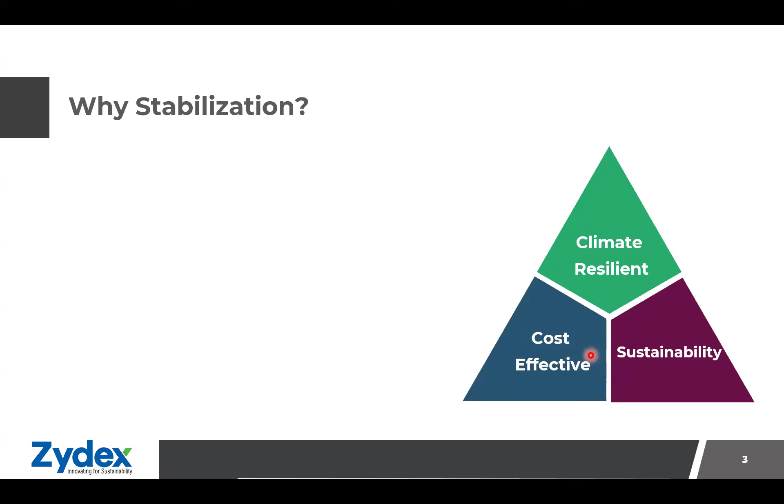We need to construct our future pavements by considering three important points: they need to be climate resilient, able to sustain changing climate conditions; cost effective; and they need to satisfy the sustainability development goals led by UN missions. So why is stabilization needed?

Basically, right now we are mining and hauling materials for road construction, which disturbs the ecology and environment. We need to construct with marginal materials and soils, recycle the existing crust material to achieve cost effectiveness and sustainability goals, and increase the service life of pavements with increasing traffic demand and changing climate, addressing climate resilient conditions.

Stabilization is a technique to improve the properties of soil and pavement layers. We have two types: mechanical stabilization, where we add granular material and compact it, related to correction of grain size distribution so we can have maximum packing density and minimize void content; and chemical stabilization.

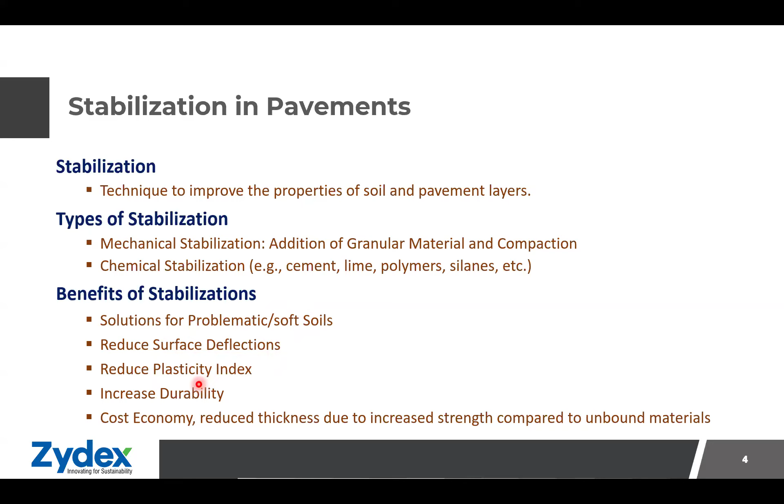In chemical stabilization, we use binders such as cement and lime, and in conjunction, chemical stabilizers such as silane-based products or polymers. The benefits of stabilization include solutions for problematic or soft soils where we cannot satisfy the CBR greater than 5 condition, failures with respect to surface deflection, problems related to pavement foundation, inadequate subgrade or base or sub-base strength conditions, and in many cases, it's required to reduce the plasticity index.

So stabilization works very well, also in conditions with prolonged monsoon seasons or stagnant water, where we need to increase the durability of the stabilized layer. In addition, we can reduce the thickness of the bituminous layer, because the stabilized layer has higher strength compared to unbound materials.

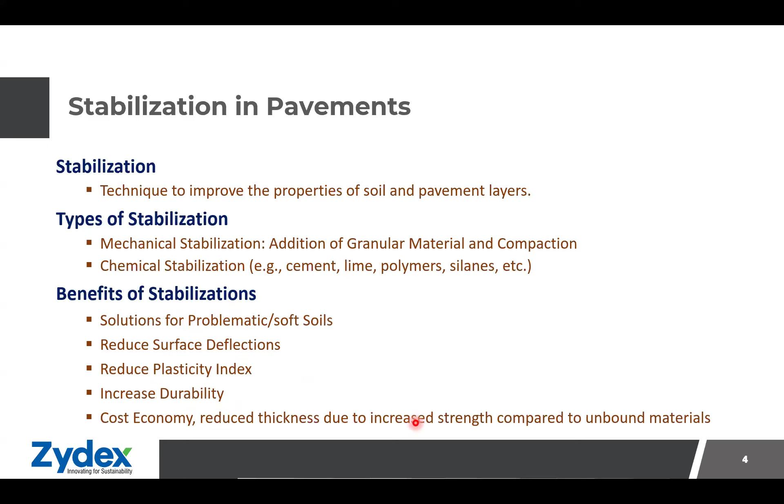Talking about the specifications for design, we have two specifications. The first one is IRC SP 89 2010. The title is Guidelines for Soil and Granular Material Stabilization using Cement, Lime, and Fly Ash. This guideline is basically for conventional stabilization agents such as cement, lime, and fly ash.

The second one is the amendment to the first one, released in 2018. It is IRC SP 89 Part 2, titled Guideline for Design of Stabilized Pavements. This was specifically developed for the use of commercial chemical stabilization with and without conventional stabilizers.

In the market, we have numerous chemical stabilizers. To name a few, we have natural inorganic powder binders, silane-based chemicals, waste oil, petroleum-based products, liquid stabilized products, synthetic polymers, and sulfonate lignin.

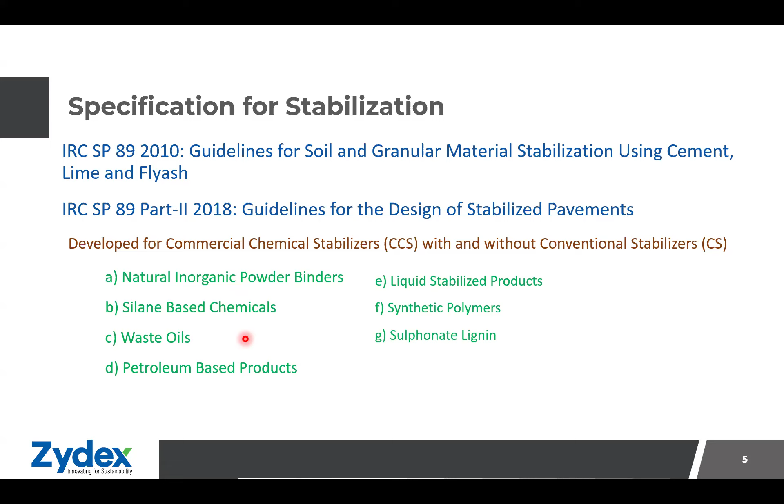Talking about the mix design for stabilization, our objectives are to provide adequate strength and durability to the pavement. We should have construction ease as well as economy. The guidelines specify two requirements for the design, and that is the testing requirement.

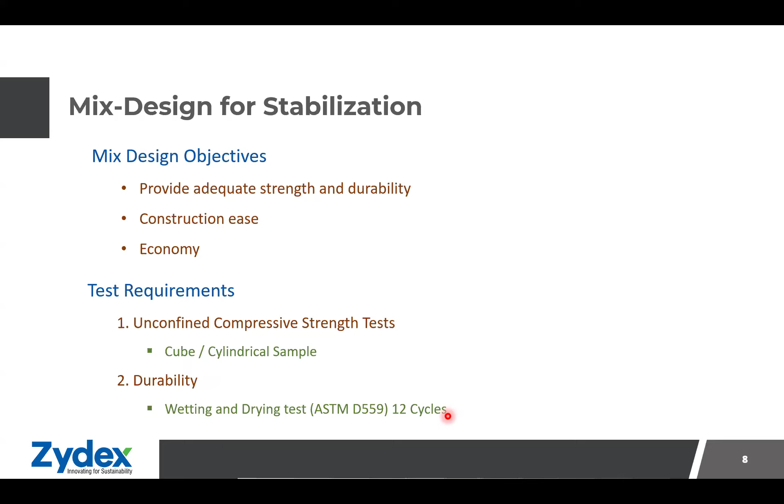The first one is the unconfined compressive strength test based upon a cubical or cylindrical sample. The second test is the durability test, to check the impact of water. In this, we have drying and wetting cycles, 12 cycles, and we measure the amount of mass loss after each cycle. We also report the UCS under dry ratio of wet to dry UCS as a residual UCS.

Now, talking about pavement design, the most important parameter for the pavement design includes the resilient modulus. We need to give three inputs to the IIT Pave for each layer: the resilient modulus, its Poisson ratio, and its trial thickness.

Based on that, we can do the stress strain analysis, and then using the distress functions, we can find out the adequate pavement layer thickness. The guidelines suggest the resilient modulus depending upon what type of hardening chemical stabilizer we are using.

For rapid hardening, the guidelines suggest using a multiplier of 1000 multiplied by UCS. That will give the resilient modulus for the base layer with a rapid hardening CS. For slow hardening CS or CCS, the guidelines suggest using a multiplier of 750.

Further, for design, we need to consider 20% of the MR value calculated using these two equations. If we are measuring the modulus using a 4-point bending test, we need to consider a safety factor of 1.5. For flexure strength, we can take directly the 20% value of UCS and use that value for the fatigue analysis.

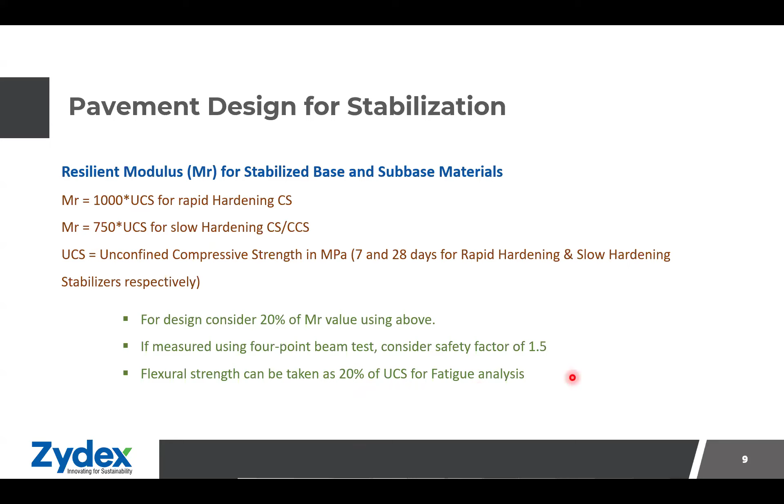Now, for the specifications for stabilization, first for the base layer, we need to achieve the UCS in the range of 4.5 MPa to 7 MPa. The laboratory strength shall be 1.1 times higher than the design strength. Also, there is an upper cap on the modulus value that we can consider.

For the modulus value based on the UCS empirical relation, we have an upper cap of 1400 MPa, whereas we have an upper cap of 1700 MPa if we do the beam testing. The guidelines also suggest doing the flexure and cumulative damage analysis as suggested by IRC 37, 2018.

For the subbase layer, the UCS needs to be in the range of 0.75 MPa to 1.5 MPa, whereas the modulus value shall be 400 MPa for the design.

Now, I'll list a few issues or cautions that one needs to consider while designing the stabilized pavement. The first issue is that the empirical equations adopted for the calculation of resilient modulus, that is the multipliers 750 and 1000, are valid for high quality crushed rock or natural non-plastic soils.

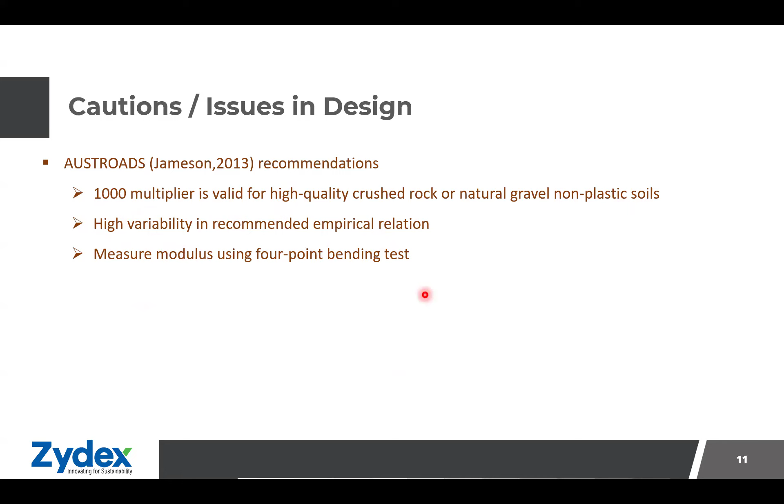Also, AUSTROADS notes there is high variability in the empirical equation, and therefore recommends measuring the modulus using a 4-point bending test. The multipliers we are currently using are not valid for soil aggregate mixtures with a PI of more than 20 for subbase and more than 10 for base layers.

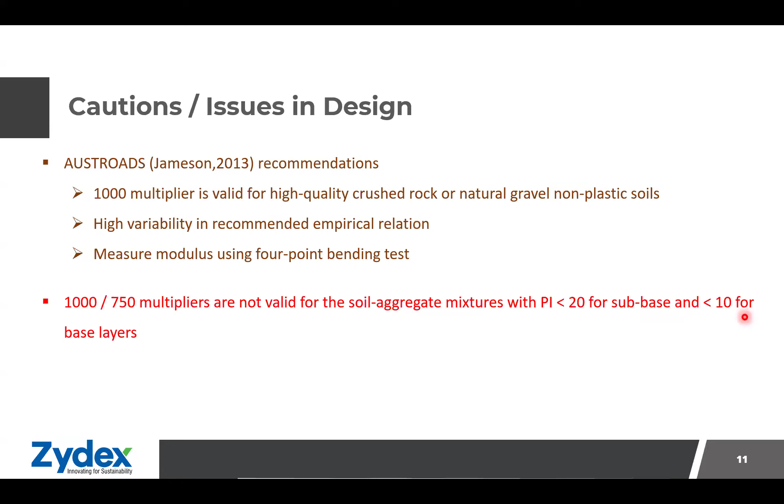Therefore, it is recommended to measure the flexure strength and flexure modulus using a 4-point bending test. There's an appendix in IRC SP 89 which talks about the measurement of modulus using a 4-point bending test.

But the guideline recommends measurement under static or monotonic loading conditions. Also, the formula for modulus needs correction as it does not consider the deflection or strain value while calculating the modulus. Therefore, it is important to measure the flexure modulus using a 4-point beam test, considering the deflection, as well as under repeated loading conditions.

This is important because the flexure fatigue models are developed considering the modulus under repeated loading. The modulus that we get from monotonic loading as well as under repeated loading may not be the same.

This is one of the equations as suggested by AUSTROADS AGPT T600. This equation is for modulus calculation, and it considers the repeated loading as well as the resilient deformation that we get through the repeated loading.

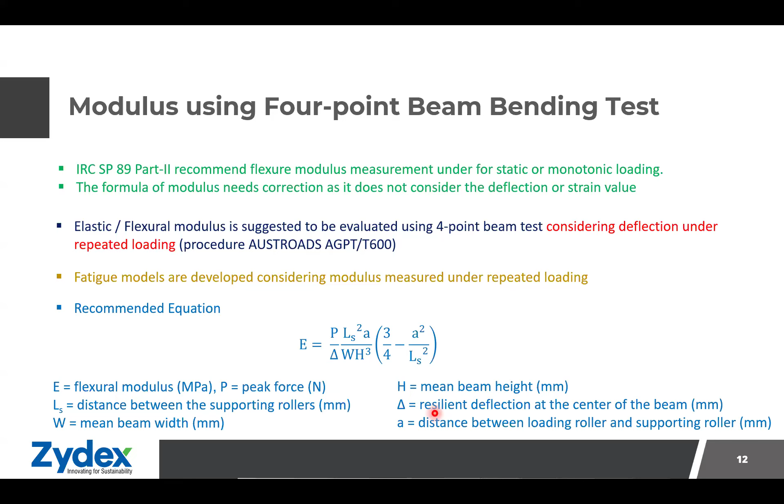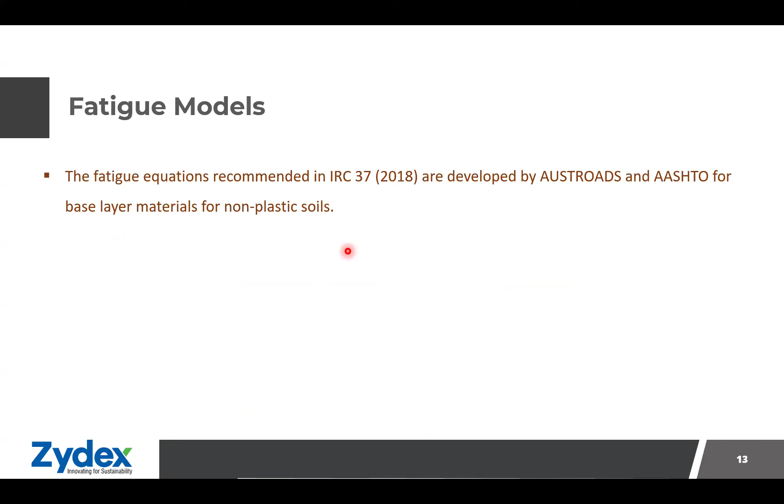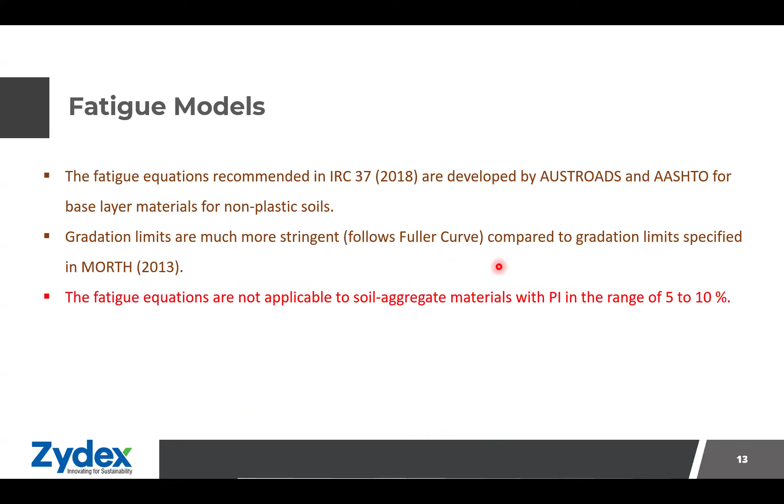Further, talking about fatigue models, the fatigue equations recommended in IRC 2018 are developed by AUSTROADS for base layer materials for non-plastic soil, as indicated previously. Their gradation limits are more stringent, following the Fuller curve, with allowable limits within a very narrow range. But the specifications laid in MORTH are quite wide. Also, the fatigue equations are not applicable for soil aggregate materials with PI in the range of 5 to 10. Therefore, we need to develop our own fatigue equation for both conventional and chemical stabilizers specific to the material specifications used in India.

Further, we also need to consider the impact of moisture on modulus. For the subgrade, we consider the 4-day soaked CBR. This is considered in order to simulate the worst case scenario that can happen in the field.

But for the stabilized layer, are we really considering the correction for the modulus, or are we measuring the modulus under wet condition? That is questionable. The current framework we are following is measuring the UCS at 7 or 28 days, depending upon the hardening agent used, and then using empirical equations or the 4-point bending test to find its elastic modulus, and then putting it into fatigue models to get the life of a pavement. But in this, we are not actually capturing the effect of wet condition in the analysis.

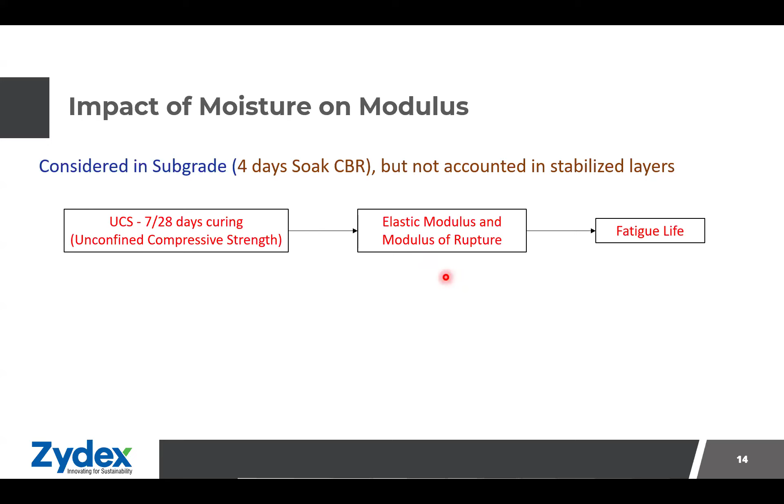There's a 20% correction factor that is considered, but does it really account for moisture or does it account for other variabilities? That is questionable. Also, we have a durability test that accounts for moisture impact, but durability measures the mass loss - it is really abrasion resistance and does not measure the material stiffness in wet condition. Our pavements undergo 90 to 100 days of monsoon. Therefore, modulus in wet conditions should be considered in the design.

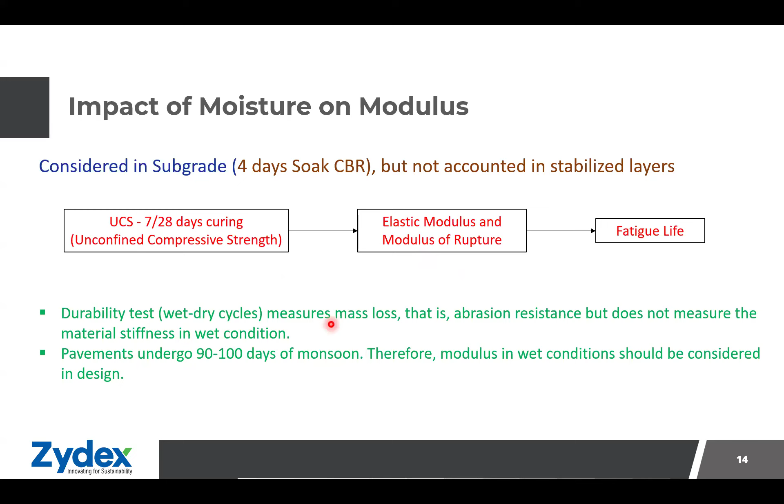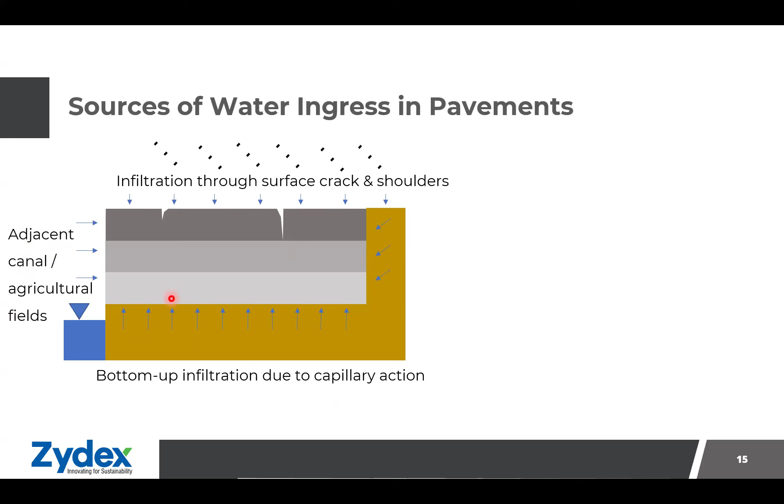Now, talking about the impact of water, we have multiple sources of infiltration in pavement. That includes surface infiltration through cracks and shoulders. We have bottom infiltration through capillary action also, and there could be side infiltration due to agriculture fields or adjacent canals. So this water leads to degradation of modulus of the structural layer that eventually leads to weakening of the pavement layers, its bearing capacity, and eventually leads to the formation of potholes, leading to failure of the pavement.

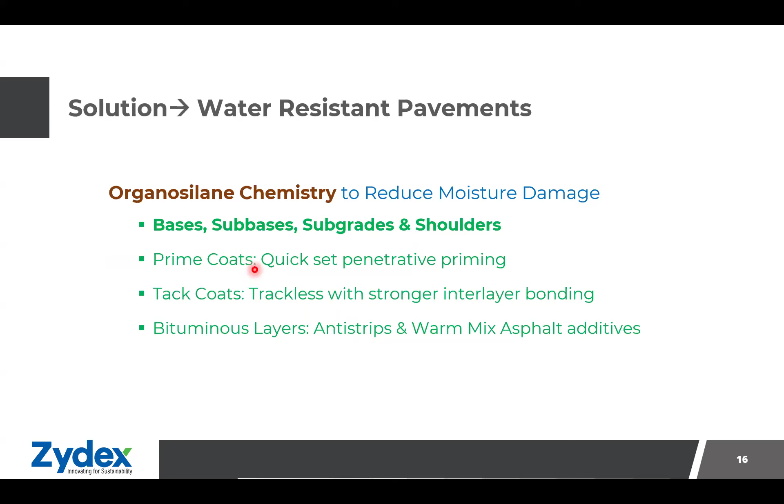Now, the solution to this problem is water-resistant pavement, where we can adopt organosilane chemistry to reduce the moisture damage. So we have the solution for all layers of pavement, but I'll be focusing in this talk on the bases, sub-bases, shoulders, and subgrade stabilization.

So what are organosilanes? Soil inherently has a water-loving nature where it just absorbs water as soon as it comes in contact, but after treatment, it can repel water as shown in this figure. Actually, soil has a surface nature of OH groups, which make them hydrophilic, water-loving. It consists of silanol groups as shown in this figure. Due to this, there happens to be continuous absorption of water that leads to a reduction in its modulus.

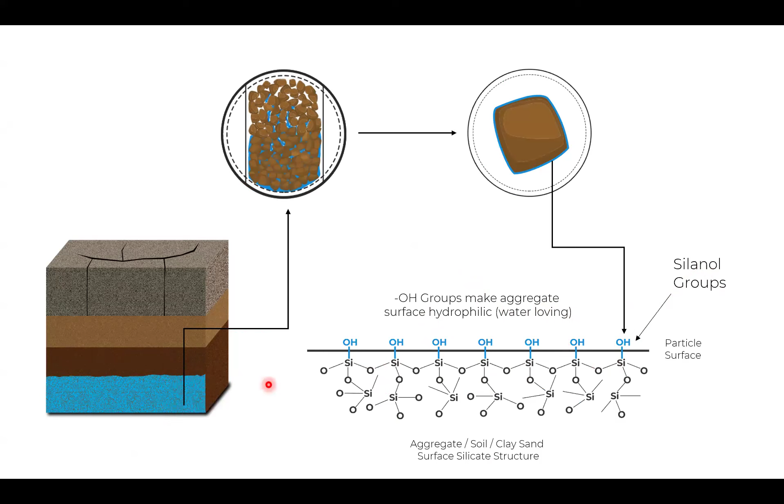Now, once we treat it with organosilane additives, what it does is create a hydrophobic zone, a water repellent zone. The thickness of such a layer is almost 4 to 6 nanometers, and this is an alkyl siloxane surface that gets formed above the soil surfaces. So essentially, this reflects in water repellency, and whatever capillary action or water infiltration that was happening gets reduced. This reduces the water ingress into the pavement layer, which reflects in retaining its modulus value even under wet conditions.

Now, what is the value addition that these chemicals are adding? We have two chemicals that go in conjunction. The first one is Terrasil and the next one is Zycobond. Terrasil essentially gives the water resistivity, while Zycobond gives modulus enhancement and nanobonding.

So the combination of water resistivity and modulus enhancement gives higher retained UCS. The combination of moisture resistivity and nanobonding gives higher dry-wet durability cycles, whereas the combination of modulus enhancement and nanobonding gives higher UCS, either at 7 or 28 days. The combination of all these gives longevity to the pavement, which gets reflected into higher fatigue life.

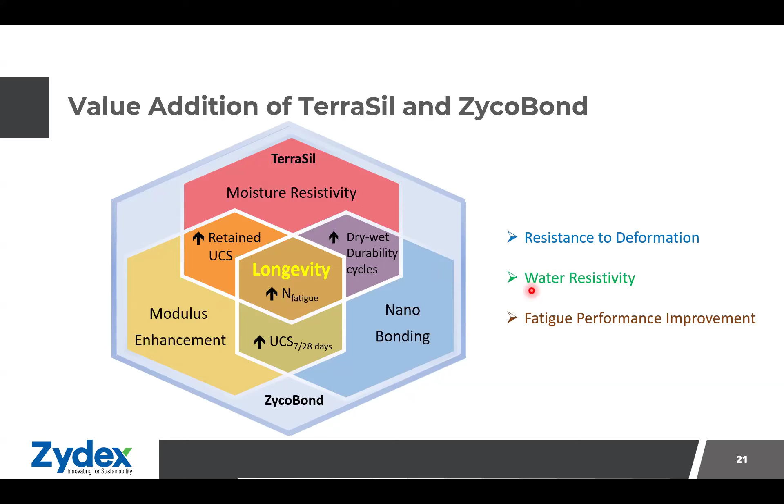So what we are trying to give is resistance to deformation, water resistivity, and fatigue performance improvement. In order to understand the impact of moisture, what we normally have is a subgrade soak condition that we consider in our pavements. But to simulate this condition in the lab...

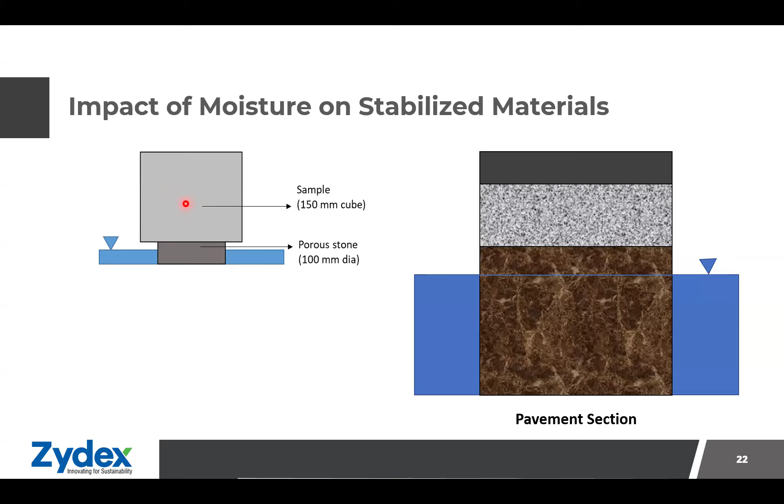I'm trying to show, if we have a stabilized base layer and a bituminous layer and a subgrade under submerged conditions, this condition can be simulated in our lab by keeping a cube sample on a porous stone, which is submerged under water. Since this is a soil plus aggregate mixture, it has a tendency to absorb water. This absorption leads to further issues and water-related damages.

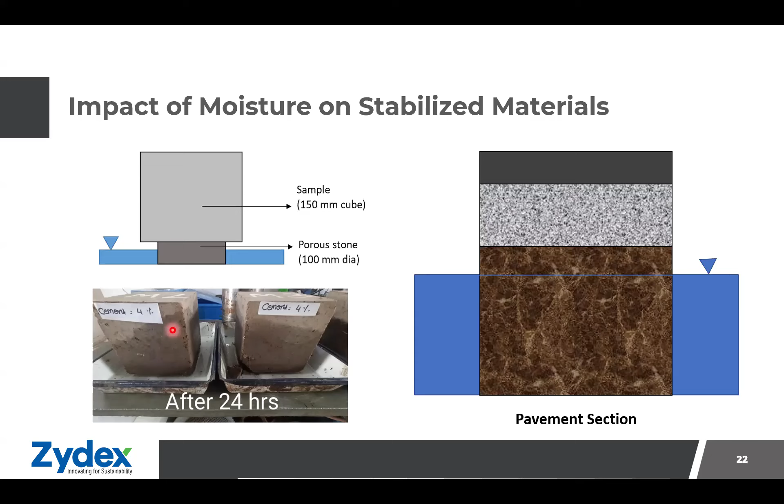So this is one pictorial view from our experiments. The porous stone, with the cube kept on it, is under a water bath. Here you can see due to capillary action, the water has been taken up by the sample. Depending upon the additive or the cement content, the capillary uptake varies.

This slide shows a sample with only 5% cement. We can see that after 24 hours, the capillary uptake is significant, with water rising up to almost 75%, or three-fourths of its height.

As we add water repellency additives, that is Terrasil and Zycobond, the water uptake gets reduced as the dosage increases. For this figure, we have a dosage of 0.75 kg per meter cube each of Terrasil and Zycobond. For the last figure, we have a dosage of 1.5 kg per meter cube.

So this is just a visual representation, but what happens to its strength? This is reported in terms of unconfined compressive strength. So let's say we have done the regular UCS casting, and after 7 days of curing with only cement, we get a UCS value of around 3.9 MPa.

But after 24 hours of capillary intake, when we measure its UCS value, it drops down to around 1.4 MPa, which is significantly less - almost less than 50% of its original value.

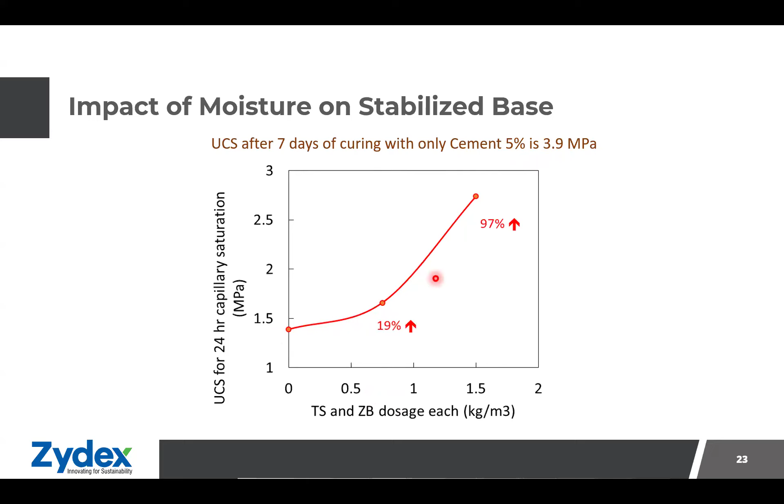But we can retain this value by adding organosilane additives such as Terrasil and Zycobond. Here in this figure, we can see at a dosage of 0.75, we can almost increase the value by 19%. With a higher dosage, we can retain the value by 97%.

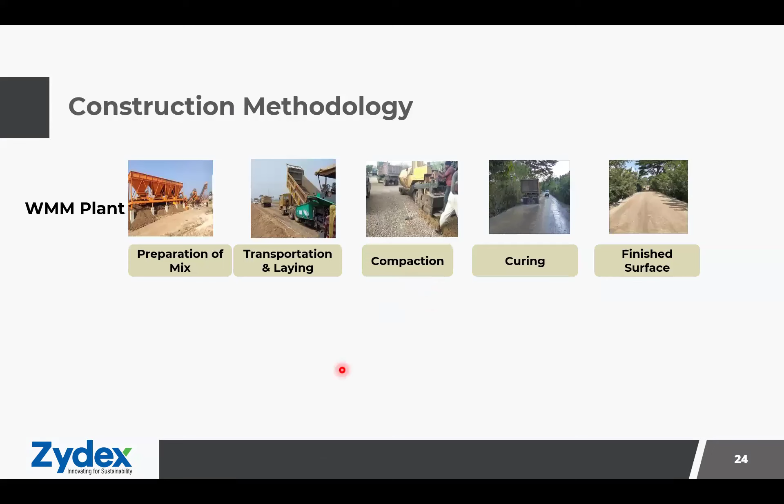Moving on to the next section, on construction methodology for the stabilized pavement - I won't go into details, but just briefly touch on it. We have two types of construction methodology: one is WMM plant-based, and the other is recycler-based.

The steps are shown in this figure, which include preparation of mix, then transportation and laying, further compaction, curing, and then the finished surface for the stabilized layer.

This can similarly be done in a more proper way using a recycler. This includes cement or additive spreading at the first layer, then water and chemical additives addition, and then in-situ recycling of the pavement layers.

Further, it consists of rolling and grading as per the camber requirements, and then final compaction using PTR and vibratory rollers.

So I'll be talking about the performance post construction of this pavement. These are a few pictorial views.

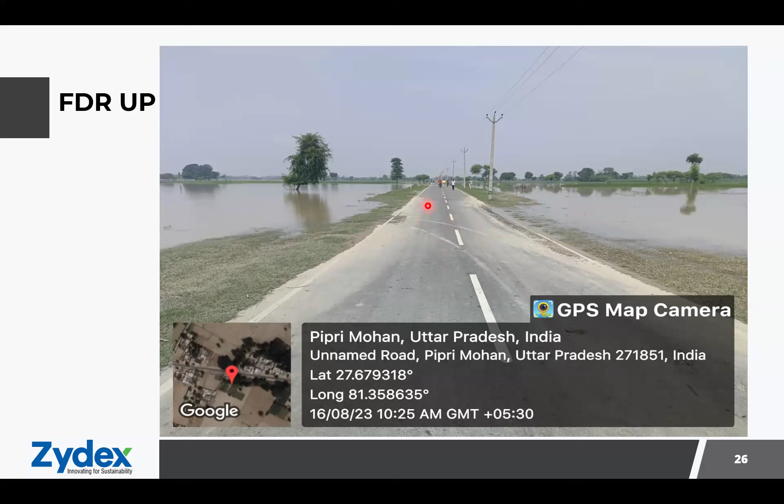Here we can see this is from the full depth reclamation in UP, where the water is adjacent to the road on both sides, and it is under completely submerged condition. But still the pavement is performing very well, giving water repellency and maintaining its modulus value. Further, the technology works in heavily frost-affected regions too.

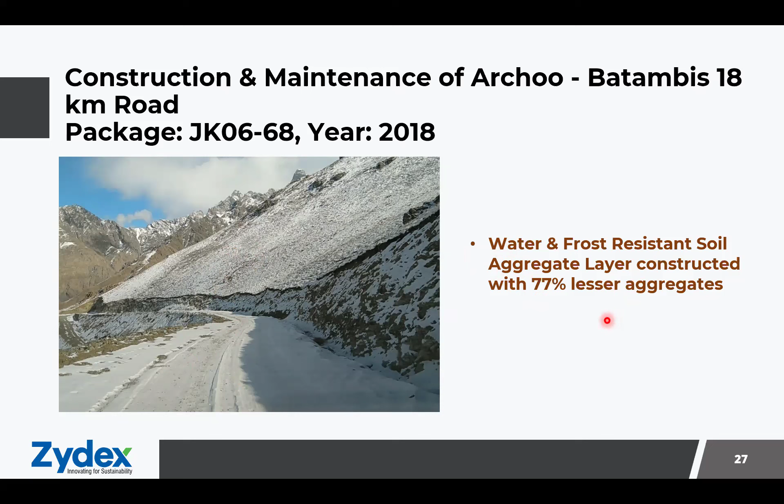You can see the snowy regions completely surrounding the pavement layer, but it's still performing under good conditions. In both conditions, we have replaced the aggregate by almost 77% and used marginal soils or borrow materials which are available locally.

Further, now I'll be showing a few of the results from the FWD test that we have done on the full depth reclamation packages in UP.

We have evaluated almost 20 roads using the KUAB FWD machine, which applies a standard dynamic load of 40 kilonewton on a bearing plate. We have geophones at standard offsets of 200, 300, 450, 600, 900, and 1200 mm, and we measure the deflections at these locations to find the deflection bowl.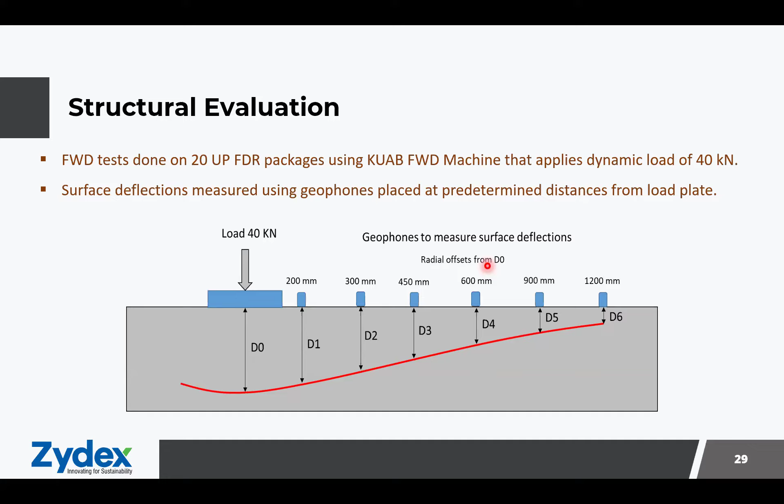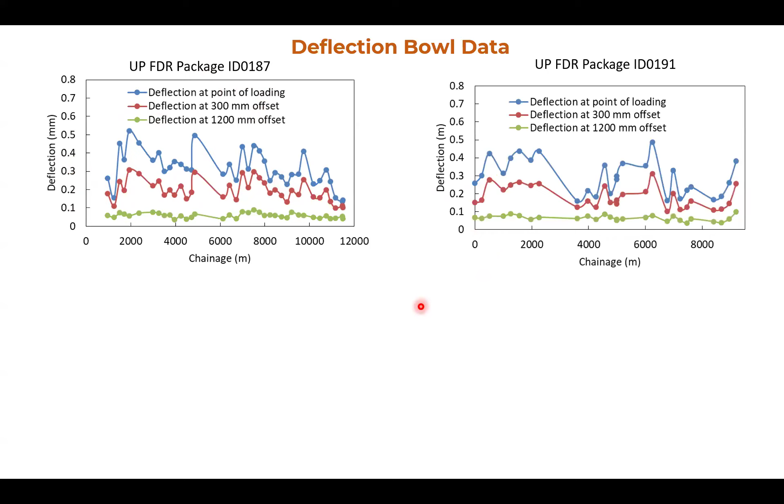This is corresponding to UP FDR package ID 187, but for just a few chainages I'm trying to show the raw data from the FWD testing. Overall, the deflection at the point of loading varies between 0.1 mm to around 0.6 mm. Sometimes, wherever there has been poor conditions or localized failure, the deflections can even go up to 1 mm, but overall the deflection is around 0.5 mm.

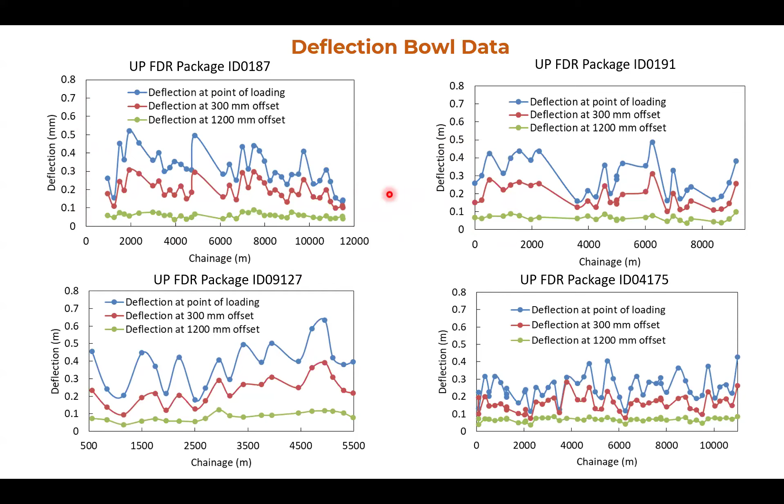This data is pre-monsoon, that is, before the monsoon season. We are also taking readings after the monsoon season. Right now the evaluation is in progress, just to understand what is the correlation under wet conditions.

Now, talking about the FWD back calculation procedure. IRC has a code, IRC 115, which is practiced for the FWD back calculation procedure, but it is specifically developed for conventional unbound materials. It is based on a 3-layer system: surface layer, base layer or combined base and sub-base layer, and the subgrade layer. This code recommends the KGPBack software for back-calculating moduli.

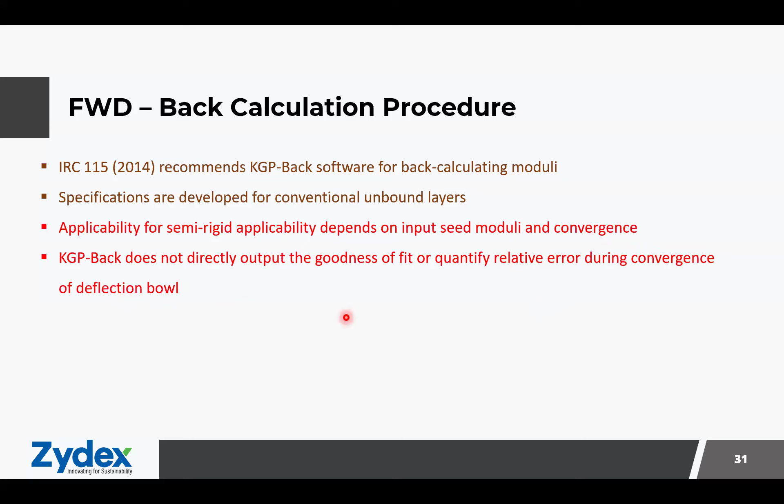Now, applicability to semi-rigid pavement depends on the input seed moduli and the convergence taking place. But the issue is KGPBack does not directly output the goodness of fit or quantify the relative error during convergence of a deflection bowl. This issue can be addressed by iteratively changing the seed moduli to ensure proper convergence, or else by comparing KGPBack's deflection bowl with IIT PAVE.

That means the modulus calculated from KGPBack can be put into IIT PAVE, and then we find the surface deflection corresponding to the offsets we considered. By comparing the two deflection bowls, we can measure the relative error in terms of R-square, or we can also consider the root mean square error.

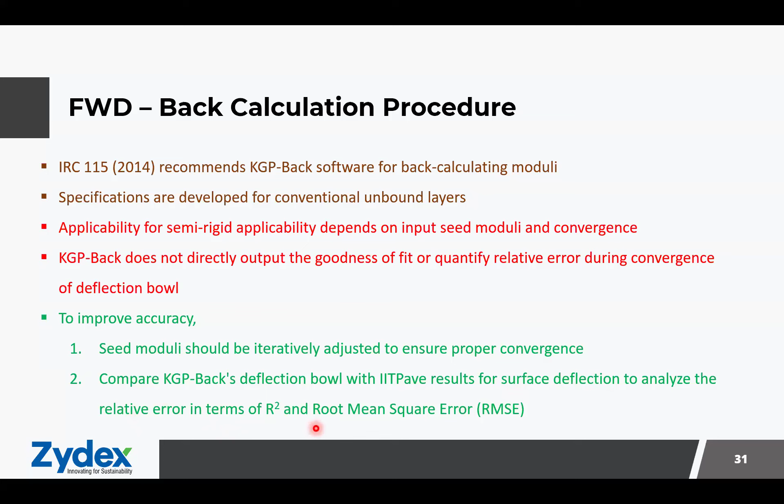Now let me illustrate the problem associated with the FWD back calculation. Let's say we have measured the FWD bowl using the KUAB machine, shown in the red line in this figure. On the y-axis I have the deflections, whereas on the x-axis I have the geophone offsets.

Now, if I consider the seed modulus based on the models we're considering — the multiplier of 1000 and 750, the relation between resilient modulus and UCS — the expected range of the base material will be 4500 to 7000, or around 3375 to some value if I consider the 750 multiplier. For the BC layer, it will be 750 to 3000, as recommended by IRC 115, and depending upon the visual survey we can select this range. For the subgrade, it recommends considering a range of 220 to 100.

Now, if we consider this input into KGPBack, it will give us results, but it will not indicate whether the bowl has converged or not. So the back-calculated modulus it gives will look something like: 759 for the BC layer, 4502 for the base, and 99 for the subgrade.

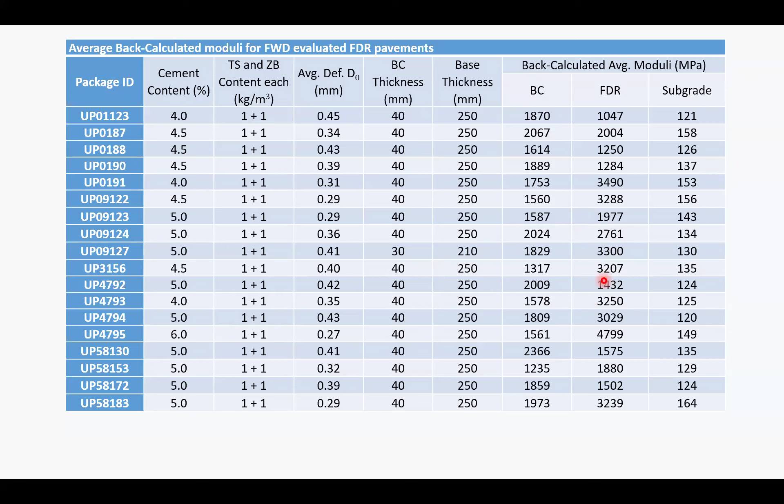This table shows results from the 20 FDR packages that we have evaluated. Overall, the modulus of the FDR base layer varies from around 1000 MPa to 3000 MPa. Therefore, the relation that we are considering is actually not applicable. We need to consider proper safety factors and come up with a proper evaluation of this pavement, and then proper specifications where we do not over design or under design our pavements.

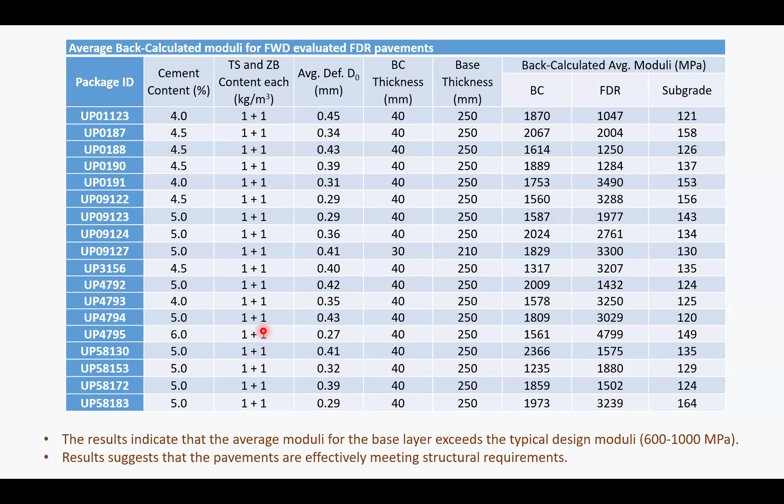Overall, the results indicate that the moduli exceeds the typical design modular value we are considering. That is because we have considered a safety factor of 20% based on the empirical equation. So this result suggests that the pavements are effectively meeting the structural requirements they were designed for.

Now I would like to highlight that we have evaluated base stabilization under heavy vehicle simulation testing that we did in South Africa. In this test, we applied an 80 kilonewton wheel load, double the standard wheel load of 40 kilonewton, but the pavement sustained almost 7 million cycles.

The results indicated that the base stabilization showed higher water resistivity and minimal deformation in wet conditions. In South Africa, there was almost 43% cost reduction, because the testing was done on marginal material, and that's how we could achieve the economy. These are the few results from the heavy vehicle simulations, as well as the actual rutting that is happening.

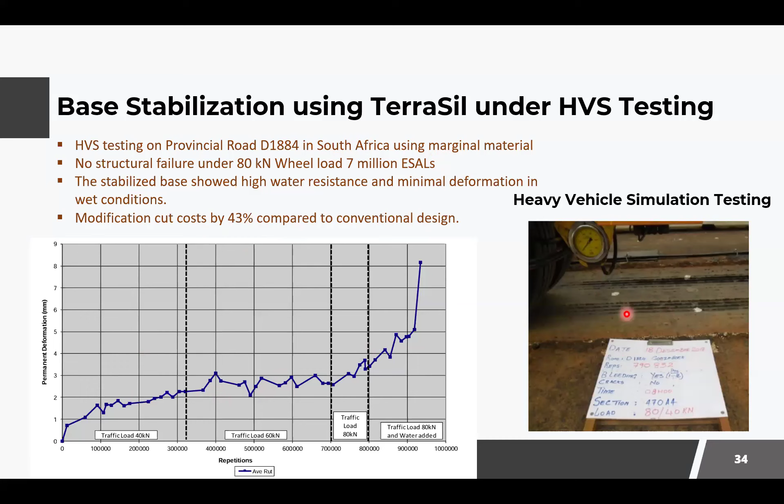Further, to demonstrate the economy, we have also constructed National Highway 208 in Tripura, where we replaced the conventional pavement section with a Zydex design, using a stabilized base of almost 340 mm. Here we have reduced the use of aggregates by 60 to 65%. This has overall led to a saving of capex by almost 10 to 20%, depending on the cost of aggregates in the localized area.

Further, we are also working on the stabilization, developing the methods. As I demonstrated, we are developing the fatigue curve for the Zydex additives under both dry and wet conditions, because wet condition is the most critical, and for that we need to design our pavement for a 90 to 100 days monsoon season.

This project we are doing with NIT Warangal. Secondly, we are also working with IIT Dhanbad, where we are doing a lab scale model and also measuring the pavement response in terms of critical stresses and understanding the value addition given by TerraSil and Zycobond. Also, we are doing a lot of FWD analysis for stabilized pavement, understanding the degradation models and developing seasonal correction factors, because the current guidelines do not talk about this specifically.

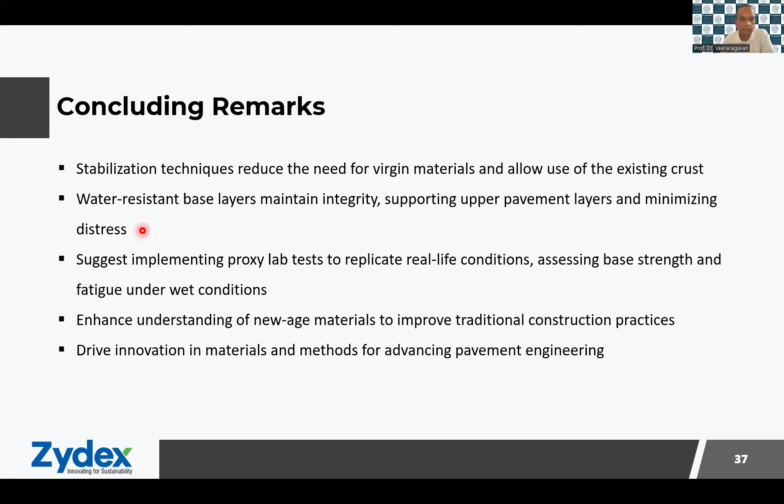Just to conclude, the stabilization technique reduces the need for virgin materials and allows use of the existing crust. A water resistant base layer maintains integrity, structurally supporting upper pavement layers, and minimizes distress. We suggest implementing proxy lab tests to replicate real life conditions, assessing base strength and fatigue under wet conditions. It is important to enhance the understanding of new age materials to improve traditional construction practice, and to drive innovation in materials and methods for advancing pavement engineering and sustainability.

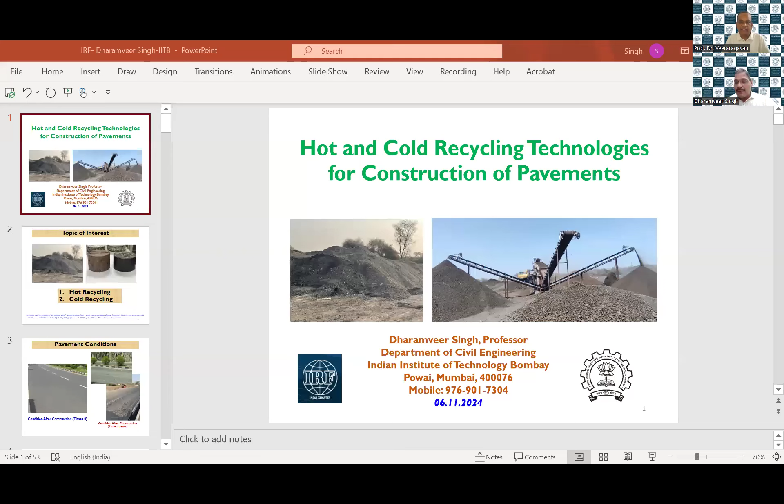Yeah, thank you, Professor Avi. Very good to see you on the other side. There are so many keywords that you have given, but 30 minutes is not enough to cover everything. I will try to touch upon some of the points. Thank you very much for the wonderful introduction, and very happy to see you. A very good evening to all the attendees here, and greetings to all. Thanks to IRF for giving this opportunity, and thanks to Akhilesh for the nice introduction in the beginning.

It's fine, you can present. I will just stop the video for the time being so that I can concentrate more on that. Professor Avi, please confirm if it is visible. Yeah, the screen sharing is seen, double click to enter full screen mode. Now is it okay? Yeah, it's fine, go ahead. Okay, I will just use this handle somewhere, it has to go maybe.

Today's presentation—I think the first presentation was quite good—I will touch upon some of the things. It's not possible to cover everything in 30 minutes, but I will give you the keywords so you understand how things are going to go. There are two things I will be presenting: hot and cold recycling. This is the interest of the topic, so we'll talk about hot recycling as well as cold recycling. Just a disclaimer: some photographs are taken from open sources, and my intention is not to commercialize anything, but to give you knowledge that you can use somewhere.

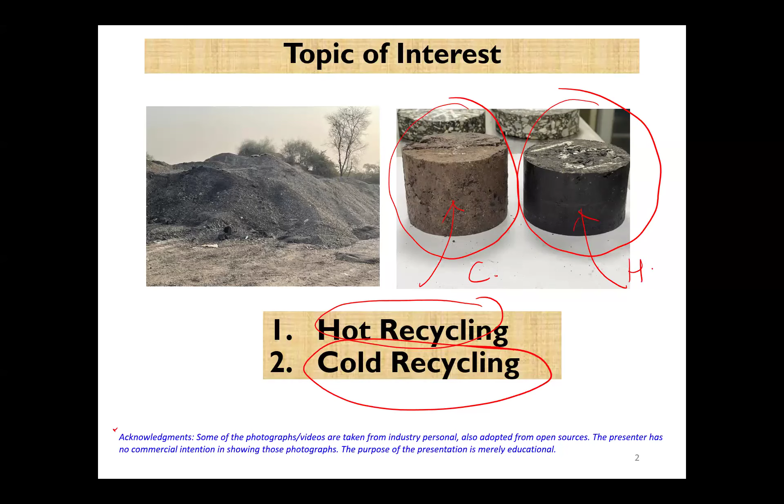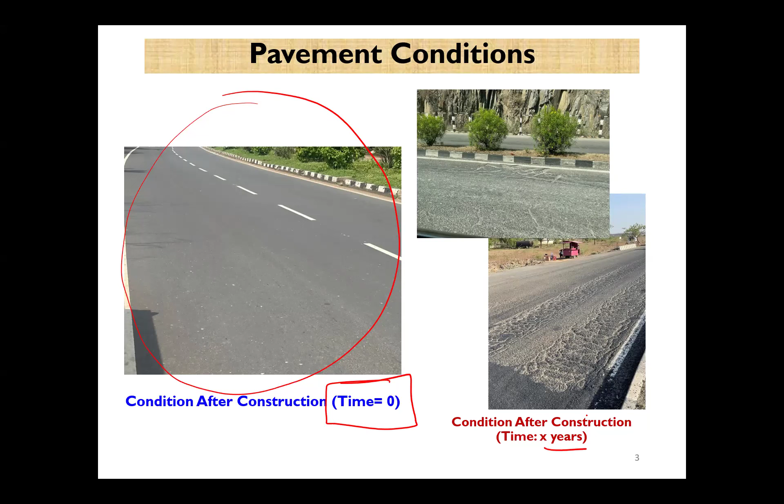However, with the time, the situation will change actually. Now, let's say for example the pavement is constructed, and this is the condition in the beginning itself, at time equals to 0. And with time, depending upon how many years, depending upon months, depending upon the quality of the work, definitely it will degrade with time actually. And certain distresses will pop up, maybe rutting, cracking, moisture damage, or certain kind of distresses. So what we can understand is that what you see in the beginning is the perfect condition of the road, and with time it will decline.

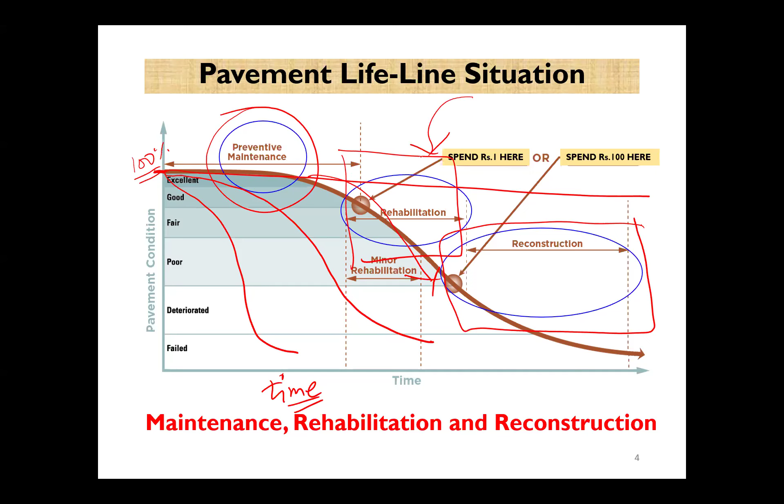Now, this is a well-known fact actually. Worldwide, if you just take the kind of material which is 100% recyclable, the bitumen mix is definitely 100% recyclable. You can use 100% recycled material in the pavement. Now there are many benefits - I'm not going to look into all these things, but this is what it comes down to most actually: if the cost saving is happening, I'll be using it. Environmental sustainability, all these buzzwords are there, but the foremost issue or eye-catcher is the cost actually - is it going to save the cost or not? If you say yes, we can use it. That is how the perception is actually.

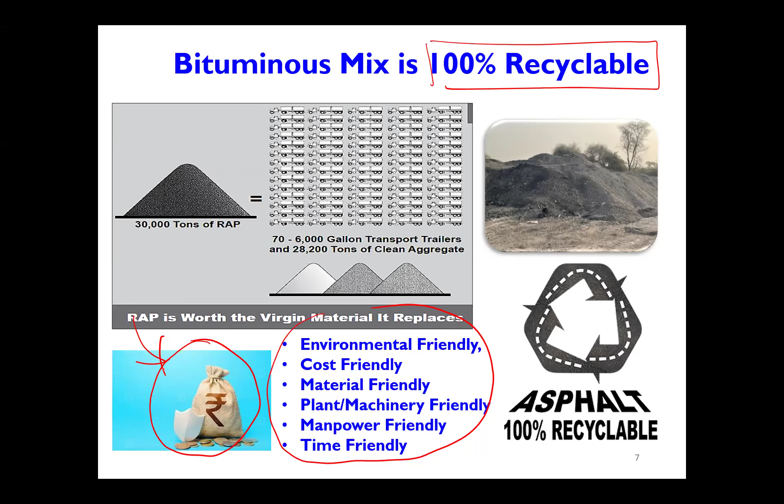And not only in India, but all over the world actually, this is how it is with all kinds of technology, whatever it is. If the cost saving is there, the next question comes whether it is going to be sustainable or whether it is going to really give good performance of the road or not actually. But yes, I think you can recycle the material 100% actually. Now, when we talk about recycling, I'm going to classify it into two terms: one is cold recycling and another is hot recycling.

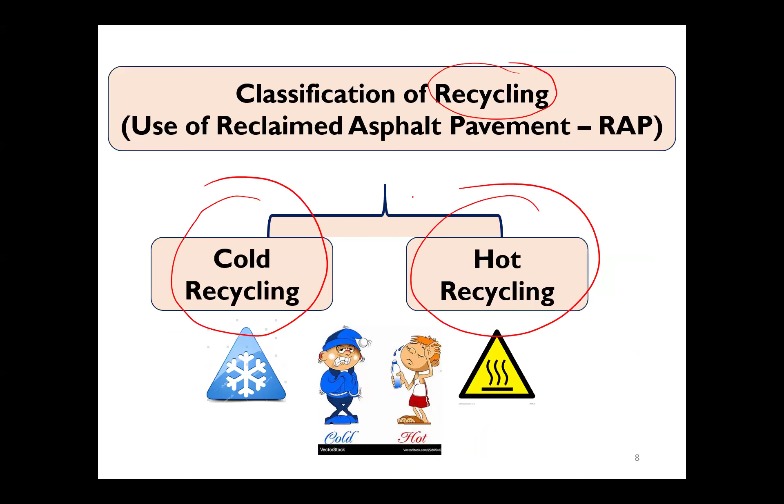The cold recycling definitely has a lower temperature. Why less? Because there are certain technologies, for example foam asphalt, where hot recycling involves going to a slightly higher temperature range.

Hot recycling, cold recycling - now we're going to talk about hot recycling first. What is hot recycling?

Hot recycling can be hot in-plant recycling or hot in-place recycling. In hot in-place recycling, you do the recycling on the spot. Or you bring the RAP material, whatever it is, onto the plant, process it there, and then start using it. How do you do that?

There have been some in-place recycling projects in India, but there are certain challenges with this technique - the machinery and the variability you get in the material. You cannot go to a larger depth of the layer because of limitations in how the machinery can really melt the material.

But hot in-plant recycling is worldwide a quite popular and the most popular technology you can think about, and you can go up to 50%. There are a couple of projects in India where people have gone even up to 60% of RAP.

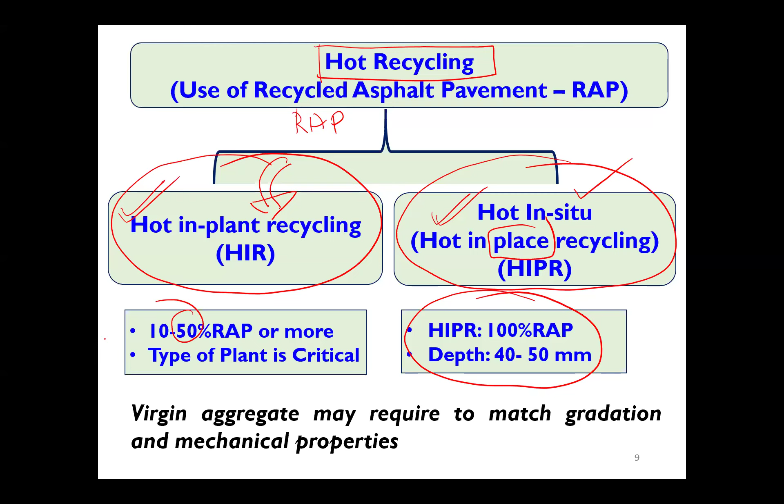And this is how we need to talk about what kind of ingredients are there, what kind of materials we can think about. These are the general queries that I see - can I even do that, first of all?

We have seen many contractors have so many questions sometimes. First of all: can I use it? Can I use the RAP? If you say yes, then another question starts. If you say no, the job stops there itself.

Can I use RAP in DBM or BC? Another question comes up, because the IRC does not allow it in the top BC layer - can I use it in the DBM layer? What percentage can I use in the DBM layer? What percentage can I use in the BC layer? All these questions are in the mind of the agency, whoever the agencies are.

Then the question comes about the rejuvenator - do I really need to use a rejuvenator? If yes, what type of rejuvenator? If no, it's okay, but you need to know about that.

Another question people fear - I've seen a lot of negligence, or you could say many people really fear the mix design of the RAP. Can I really do the mix design of RAP? My team is not trained about it. How do I do the mix design? What kind of changes do I need to make? What process do I need to follow?

Another question we see nowadays is about the plant type. I have this kind of plant - can I use up to 50%? I have this kind of plant - can I use up to 40%? Sometimes, in fact, people have gone up to 60% using a regular plant.

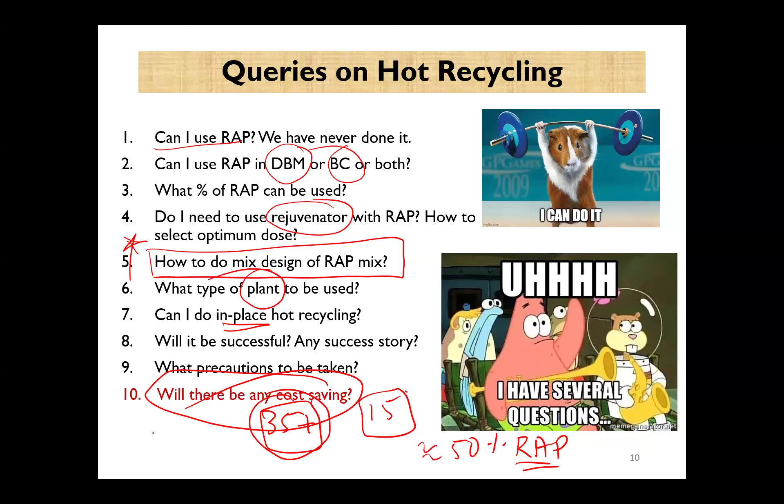These are the steps that we usually follow. Once you need to collect the RAP, remember, this collection is not just collection of the waste material. You need to be very careful about your procedure of collecting the RAP. It is not just taking out the JCB, digging out everything, pulling that somewhere and dumping it, and then you say this is the RAP.

That is not really how you get the complete benefit of the RAP. So the milling procedure has to be very careful. What kind of quality of milling that you are using, that is also very important.

Once you bring all the RAP onto the plant, and I'm going to show you a couple of photographs later on, the most important thing comes the processing of the RAP. I have not seen many contractors really following this processing of the RAP. They assume that whatever material has been collected from the site, whatever has been dumped into the plant, that is the RAP. But you have to use proper processing.

When I say processing, there are two steps. One is fractionalization. You can make it coarse RAP or fine RAP, because that will give you a better result, homogeneous mix, and good confidence level. Or sometimes there is a procedure where you can do the homogenization, mixing things together to make sure you are avoiding the variability in the RAP material. So those are very important.

Then you have to understand the RAP, what kind of RAP is there, where I need to use it, which layer I need to use it. I'm milling the DBM, and can I put it in DBM, or can I use some percentage in BC also? What kind of plant do I need to use? What kind of rejuvenator do I need to use? What is the coarse RAP and fine RAP? What kind of dosage of the rejuvenator? And then you monitor the plant production.

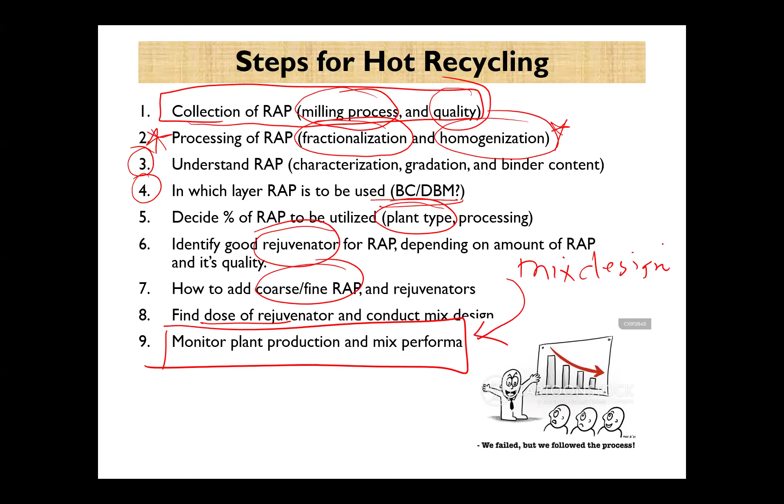Remember, the mix design itself is not your final job. If you think that somebody has given you the mix design of the RAP and you can be 100% confident on that, then you are making a mistake. Your job is to ensure that whatever the plant is producing, the RAP or the mix, satisfies the quality, not just the mix design. The mix design, somehow, it will come.

So this is how the stockpile looks like. For example, all this RAP material is here. And when the RAP material comes, it has a lot of variability. If you take one sample from here, you may find certain gradation, certain binder content. If I take one sample from here, you may find something else. If I take one sample from here, something else. How many samples do you want? Maybe 5 samples, 10 samples.

Or there are other ways you can avoid a lot of variability in the RAP if you do coarse and fine RAP. Let's say, for example, if you see here, this is your coarse RAP, and if you go this side, this is your fine RAP. Now you have much better control. Now you really have a consistent kind of mix, consistent RAP, which is coarse and fine.

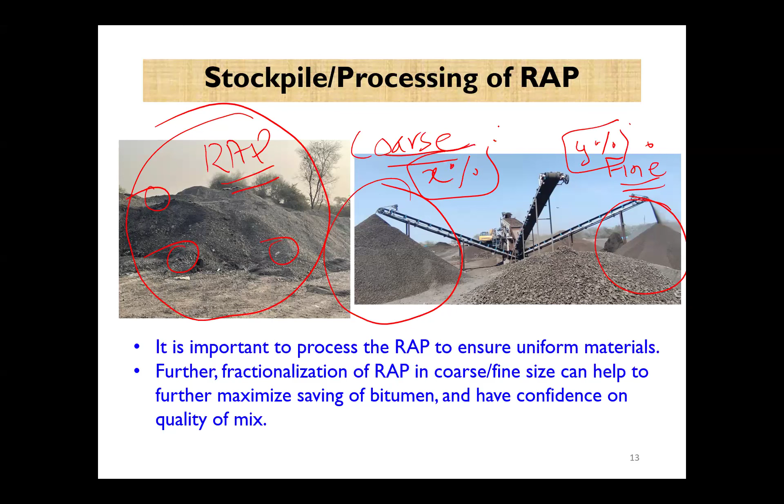And then you can use a certain percentage of the coarse, let's say X percentage, and Y percentage of the fine RAP. You have better control on the gradation, on the quality, consistency of the mix, and definitely the kind of savings that you're going to achieve. So the first step people need to really follow if they want to use a high percentage of RAP, 35, 40, 50, 60, whatever.

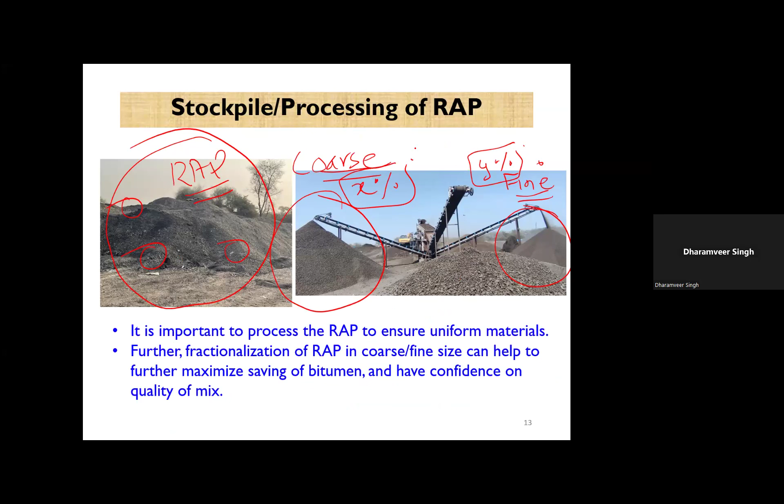Second comes the characterization. And here, what I have seen is some people think this is a complicated task, and it is a difficult task. What do I do? Why do I do it? Remember, the RAP has a stiffer binder because the binder becomes quite stiff with time. It means the softening point will increase, or viscosity will also increase.

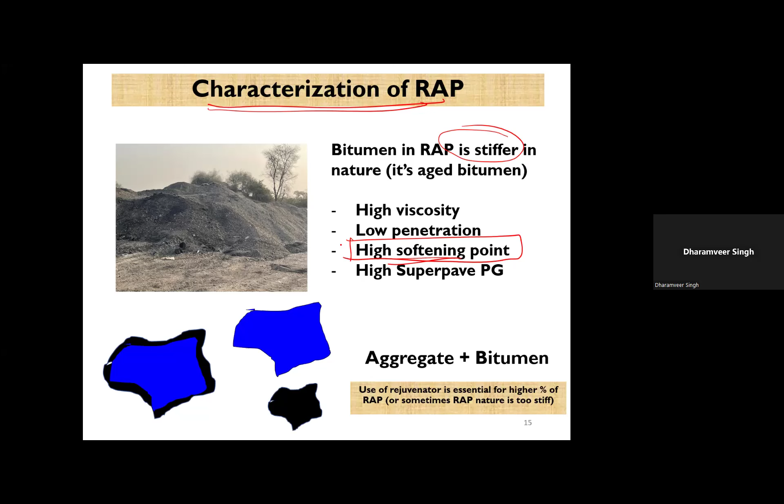There are many approaches. In fact, you can use a very simple approach of using softening point. Many countries still use the softening point approach. You extract the binder, do the softening point, and try to understand what kind of quality of RAP is there. Whether the RAP is really very stiff, or you need to use a certain kind of rejuvenator, or what kind of treatment you have to do. So the role of the rejuvenator comes with the type of RAP that you have.

Now, how much percentage do you want to use? For example, you say you want to use 30%, or maybe 50%. Then you have to be careful here, because if the RAP has a stiffer binder, it's going to give certain kinds of performance issues. I will show you what kind of issues can come up. So you have to be very careful how you characterize it.

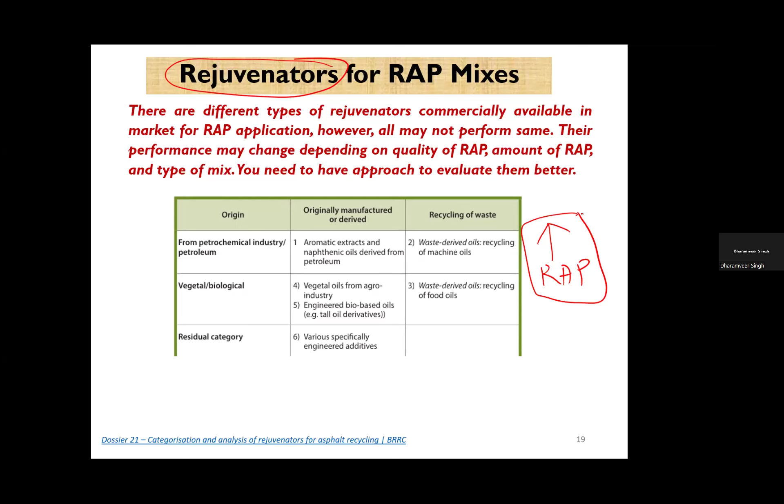Now another thing is the rejuvenator. If you increase the percentage of RAP, you definitely need to think about rejuvenators. They can help modify the chemical characteristics for better performance or durability, and a lot of things. There are many rejuvenators in the market, and not all liquids are rejuvenators. Remember that whatever liquid you add into the bitumen, viscosity will decrease anyhow. There's no magic happening, it will decrease. However, your job is to ensure what kind of impact the rejuvenator is going to have in the long term, which we have to really think about.

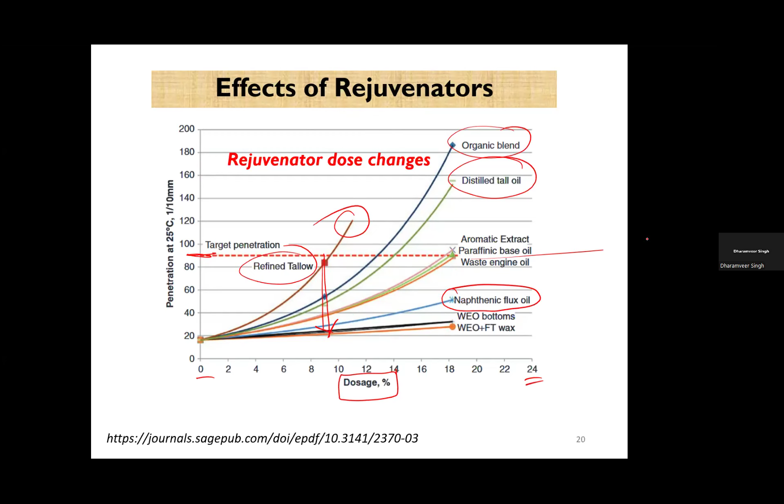This is one very interesting paper. There are different kinds of rejuvenators shown here. If you add the rejuvenator dose, say from 0 to 24%, and this is your penetration, penetration will keep increasing. Now look at the dosage of the rejuvenator. If you're using this particular rejuvenator, your dose is up to here. If you're using a naphthenic-based rejuvenator, your dose is such that it's never going to achieve it. So the type of rejuvenator and its impact is very important. How do you assess that?

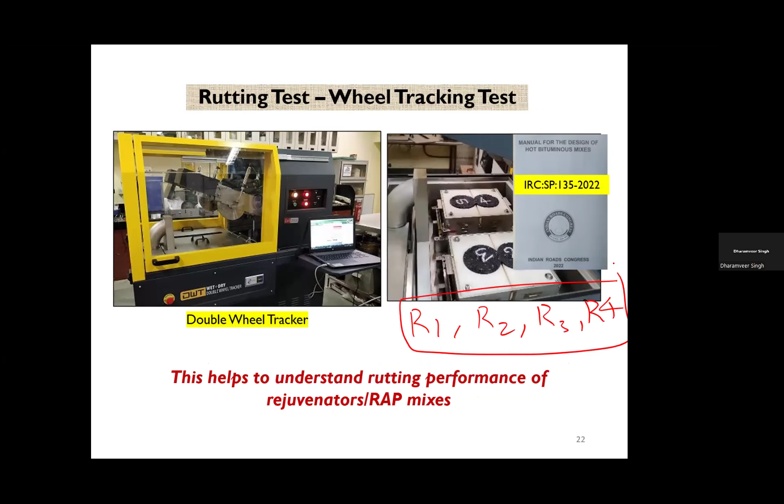Another thing is the rutting value, and I'll show you very interesting findings on that. You have different rejuvenators, say rejuvenator 1, 2, 3, and 4, and all are well established, all claimed to be very good rejuvenators. You decrease the viscosity, your job is done. However, when you look at the performance of the mix, the long-term performance, you see a very different result altogether. All the rejuvenators were very good in the beginning, they showed excellent results. However, when you do the performance test, you realize that rejuvenator 1 is going to backfire - it may make your mix so soft that it will rut 100% within no time. And if you use rejuvenator number 4, it provides better performance with less rutting issue.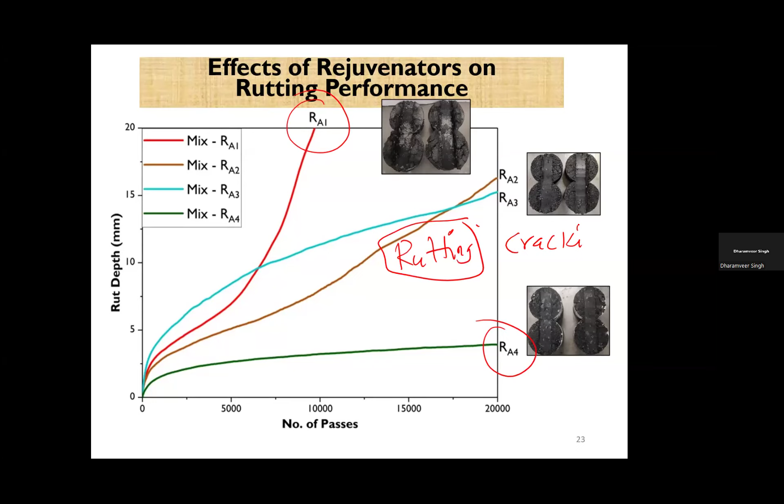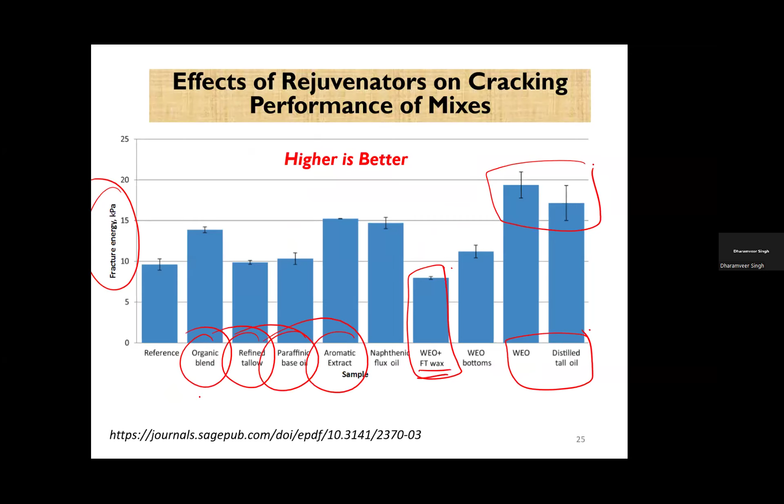You have to be very careful about what kind of rejuvenator you use and how you really monitor the performance. So this is the summary of hot recycling.

Processing is very, very important. Stockpile the RAP, protect the stockpiles. Remember, when milling happens, a lot of moisture comes into the RAP, so you need to account for that. You cannot dump maybe 30 to 40, 35% RAP directly into the pug mill, because this RAP has more than 3% moisture, and this is going to create a problem.

You have to bump the temperature maybe around 180 or 185 degrees, and then evaporate the RAP moisture, as well as indirectly heat the RAP. You have to be very careful about what kind of characterization, what kind of plant, what kind of processing, and what kind of coarse and fine RAP combination you are trying to use.

Establish the mix design, check the performance. Once you are satisfied with that, your job is almost 80% done. Now you have to fine tune your plant production, which you have already mastered. But the only thing is, when you are using RAP, plant production becomes slightly tricky because the RAP has to be heated.

Either you have the parallel drum plant, which people are using nowadays for high percentages of RAP, but the cost of those kinds of plants is slightly on the higher end. There are a couple of sites where people have used those kinds of plants now, and we have been picking up in that particular area. So this is the future, this is how we have to go.

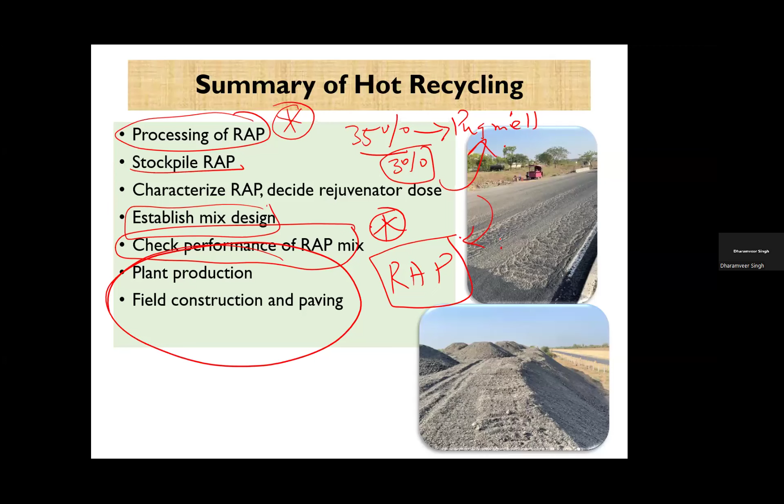Now comes cold recycling. In cold recycling, if you see, I already showed you these 2 samples - this is the cold, this is the hot. If you break them up, this is how the things look like.

People usually ask a lot of questions. So what is cold recycling? How much percentage of RAP can I use? Can I do emulsion or can I use foam bitumen? Which one is good? Can I go for whatever emulsion I have, or can I use whatever bitumen I have in the foam as foam bitumen?

Can I do the recycling in the plant? What kind of plant is required in situ? What kind of in situ machinery is required? I will show you a couple of interesting in situ machinery which people are using nowadays. How do I do the cold recycling mix design?

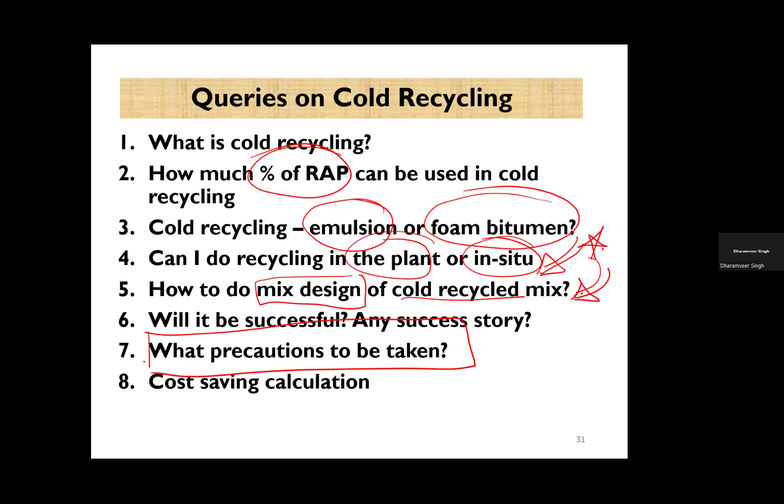This is the kind of link that we have been trying to improve upon, because the approach we have been using is not really applicable sometimes for heavy traffic loading conditions, which we are going to discuss. What precaution has to be taken? There are certain failure stories for hot recycling as well as cold recycling, but it doesn't mean that the technology is bad, or that you should not use it. There are always ways to learn, there are always ways to improve upon. This is how, let's say for example, your pavement looks like.

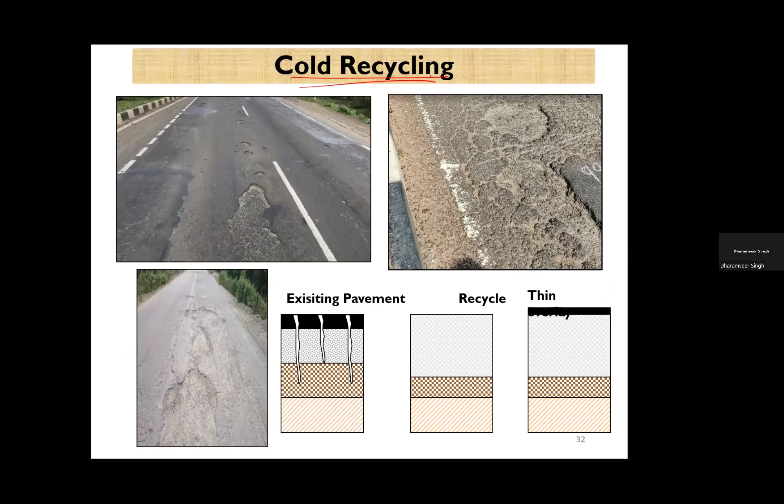Either you can think about in-plant recycling, or you can think about in-situ recycling. Now, this is how the things look like. You have the emulsion, you have foam bitumen, you can do in-situ also, you can do in-plant also. In-plant means you can do full central plant recycling - you can have a dedicated plant and do the recycling there, or you can have in-place recycling. Some people call it a BSM mix, bitumen stabilized mix, and some people call it cold recycling mix. So it's up to you how you really want to understand it.

But emulsion and foam - many people prefer emulsion is better, but some people say foam bitumen is good because you don't require any kind of curing. You just construct it and use it. In the US, or maybe some parts of the world, both techniques are quite popular, foam as well as emulsion.

These are the ingredients in the cold recycling. You have the RAP - again, RAP is coming, and you can use up to 80 to 100% RAP in the cold recycling. Whatever RAP you have, you can definitely use it. You have the water, you have the fillers, and then you have the emulsion.

You compact the sample, prepare the sample. Remember, these samples are going to have almost 9 to close to maybe 14% air voids. A lot of voids are there, remember.

So once you construct this particular layer, you need to be very careful that you protect it further. Otherwise, it is going to have a lot of raveling issues, or it will absorb a lot of water with time if there is rain. So you have to protect it. It is not the top layer, remember that.

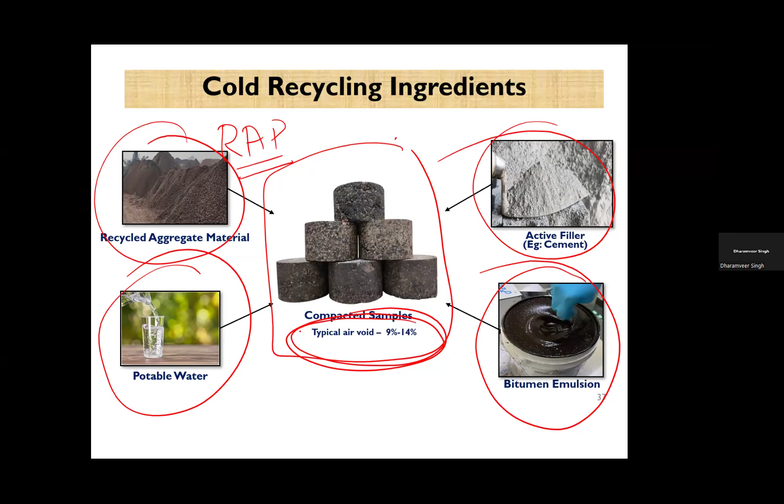It has to be protected with some kind of overlay - either you put DBM, BC, or maybe any other overlay that you have to put up. So that we have to think about.

This is how the mix design happens, and this mix design is well established. People do ITS value testing - 225 in the dry condition, 100 in the wet condition. But what we are thinking is that these particular ITS values are not going to tell you all the story about the mix. You need to rely upon what kind of performance the mix looks like.

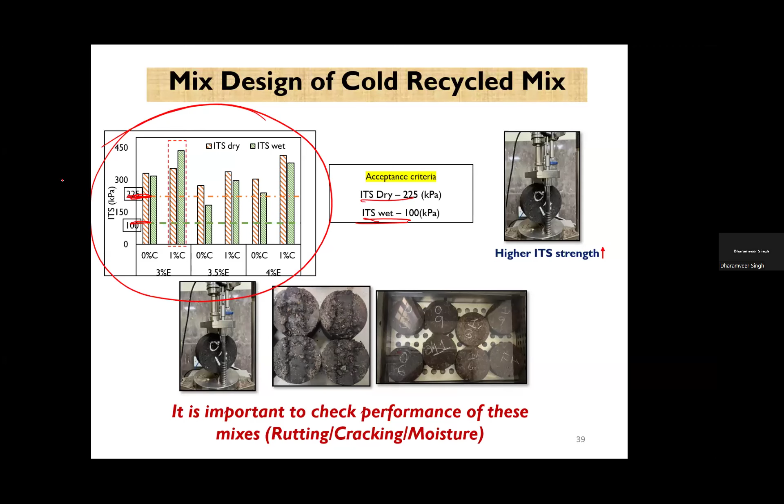When I say performance, it means the cracking - for example, if you add too much filler, it will crack. Or what kind of rutting performance? Can I use that particular layer on the top layer somewhere, maybe close to within 100 mm or so? If so, what kind of performance do I want?

Now, this is how the cold central plant recycling happens. You have the milling machine. Again, remember, the processing is very important. It's not like you can use the cold recycling and forget about the processing. The steps remain the same.

The RAP processing or RAP characterization remains the same. Definitely, you are not very much concerned about the bitumen content in the RAP, but the quality of the RAP you are concerned about - what kind of coarse RAP, fine RAP, how do I adjust the gradation? Then you just bring it here and pave it, and this is what you construct.

I will show you a couple of advancements happening nowadays in cold in-place recycling, and this is very much required nowadays in India also. One is a single unit train, then a 2-unit train, and a multi-unit train. Single unit train is just one machine - there is no screening, no crushing.

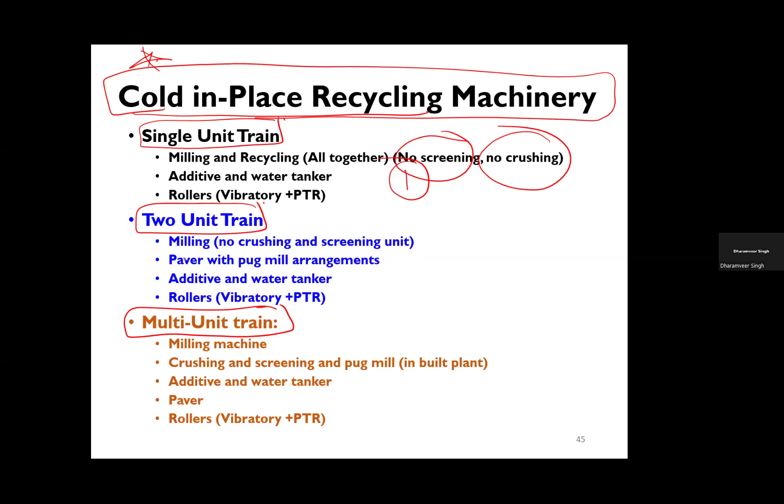Nowadays, a lot of projects are going on with the single unit train - one machine does everything on the site. 2-unit means you have the paver now too, and this is very much required because when you are doing the milling or in-situ milling, if you have the paver, you have better control on thickness, uniformity in compaction, and a homogeneous mix.

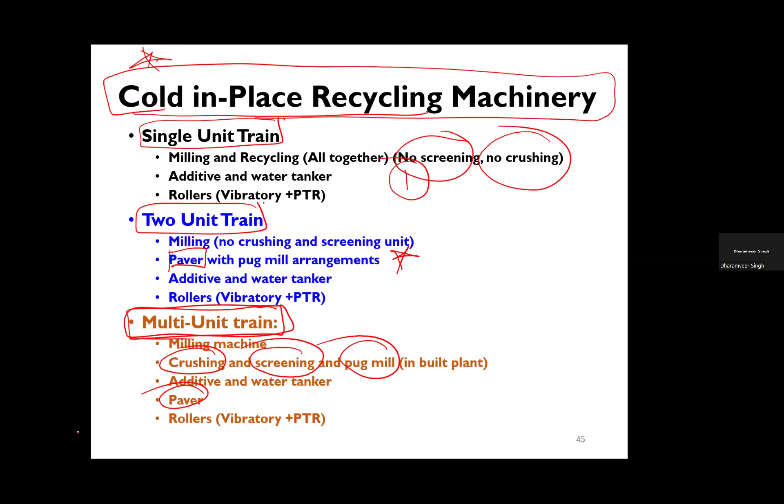Other machinery coming nowadays is the multi-unit train. On the site itself, you have the crushing, the screening, the pug mill, and the paver, and you just keep on doing it. I will show you some of the photographs.

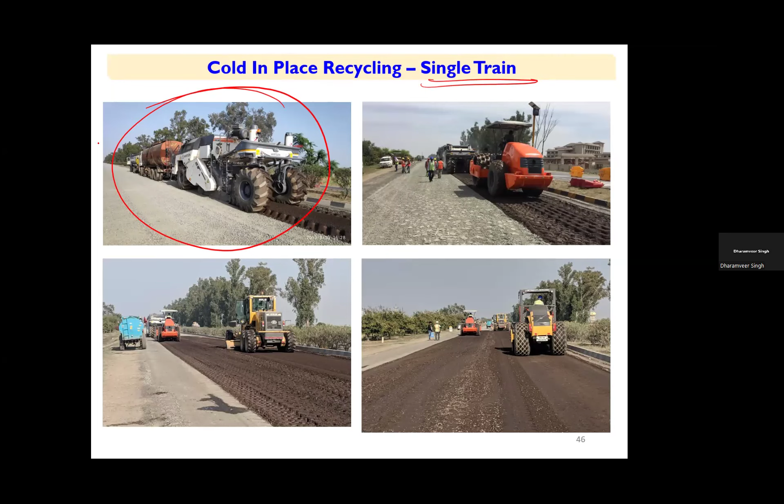This is the single unit train - you have the single machine which is doing everything. Remember, there is no control on the gradation here, and there is no 100% surety that you are going to get the homogeneous mix all the time. There may be certain variability in certain places. Thickness control also has to be there - it may not be 100% uniform sometimes, and there are certain quality issues that may come up. So this is the single unit train.

Many people have used this kind of approach nowadays. In fact, many people are also doing combinations of the layers nowadays, maybe in-place recycling, cold recycling, then in-plant recycling.

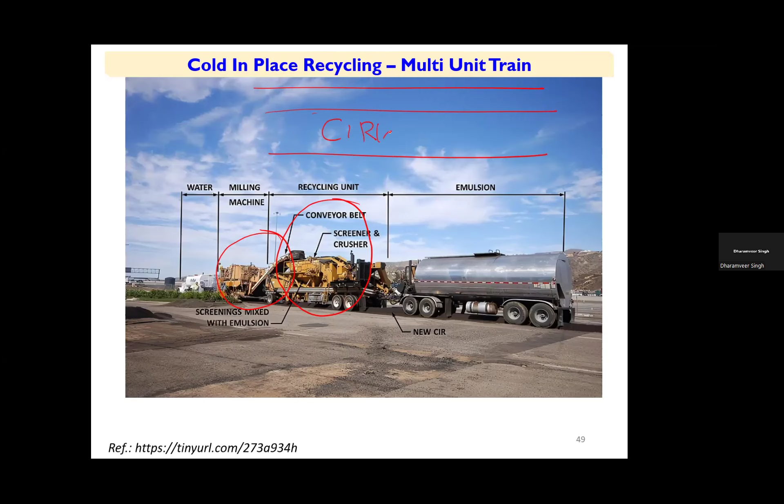That is also possible. For example, if this is your pavement here, this particular layer can be cold in-place recycling, or this layer you can do cold central plant recycling. That is also possible nowadays. In fact, people are doing that, depending upon the project type. So you can do a combination of recycling methods. This is how the things will play.

In fact, FDR is also being done using emulsion. We have seen if your layer has GSB or DBM and BC, and if you are doing FDR—when I say FDR, I'm not considering the subgrade and all—if you go up to WMM, you can easily do your FDR using emulsion and any cementitious additive. That is also possible.

You can use emulsion, you can use foam. In fact, many projects in the US and some other countries use emulsion for full depth recycling. When you have a lot of aggregates in the layers, emulsion and foam additives can be used. But when you have a lot of soil—maybe 60 to 70%, or maybe 40-50% soil—you have to think about what kind of additive should be utilized for construction. So this is another way of doing the FDR technology that people are using nowadays.

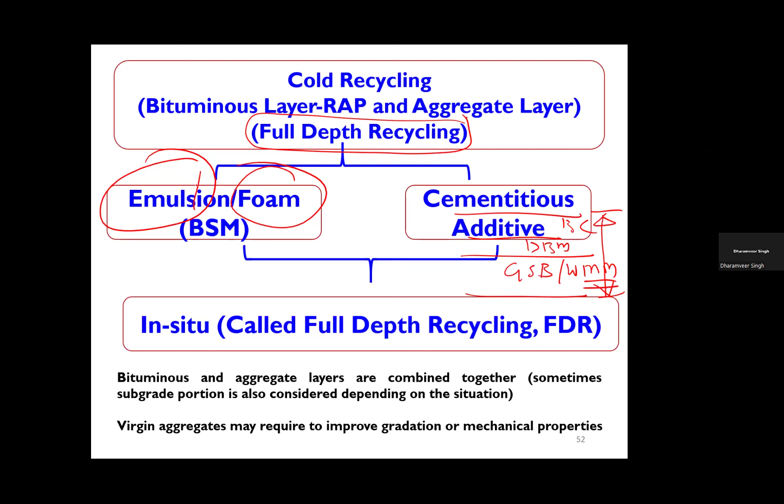And with that, I will thank you, Professor Avi, for giving me the opportunity here.

Yeah, that's a good presentation, DV. I think you opened up many issues of concern. You showed how hot in-place recycling and central plant recycling, as well as cold in-place recycling and cold central plant recycling, are different, and what the needs are.

Let us hear from the participants' other questions. Those who have some doubts and clarifications, kindly post them under the question and answer section. We'll take it up. Let me first take the questions posed to Mr. Shubham, and then we can come to Dharamveer.

Shubham, the first question they have posed is whether the lab UCS value is 1.1 times or 1.5 times the specified UCS.

Right now the practice is to consider 1.1 times, but I think in IRC 37 there is some clause which mentions 1.5 also. Right now, 1.1 is recommended.

That is fine. I think this is where I also have an issue with you. Everywhere you're referring to IRC, saying this is mentioned in IRC. But what I expect from you as a researcher is to say: this is what I got in the lab, this is what I'm getting in the field, therefore the IRC value should be modified like that. Will you be able to come out with that?

Have you tested lab samples? And then for the same lab mix design, have you tested the field samples and found the relation? So we are working on those lines. Yeah, that is what is needed now.